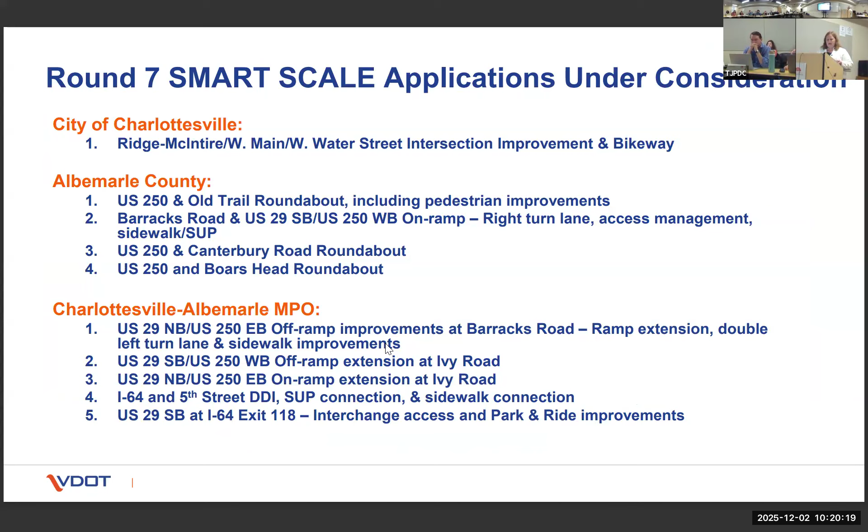This is just a big picture map that shows the location of all the projects. I think Charlottesville's project is a little bit hard to see, but it's right there in Charlottesville.

And so the first project is the bikeway improvement and intersection improvement project at Ridge-McIntire and West Main at the intersection. And Ben, I certainly don't want to steal your thunder. If you would like to talk through it, happy to let you, or I'm happy to take it from here. You go for it. Okay.

Yeah, so this is not the final concept. We're working on updating it. But the main improvements considered as part of this project are that there will be a two-way bikeway along the north side of West Main Street from 4th Street to the Ridge-McIntire intersection. What's different from this concept is that the two-way bikeway is going to continue through this intersection, and it's going to continue along the south side of West Water Street to 2nd Street Southeast.

So southeast, that's next to the parking garage. Water Street is going to become a one-way street going westbound, and it will use South Street as the one-way pair. The final concept is also planning to maintain the contraflow bike lane along South Street. The slip lane at the west intersection at West Main Street is going to be removed.

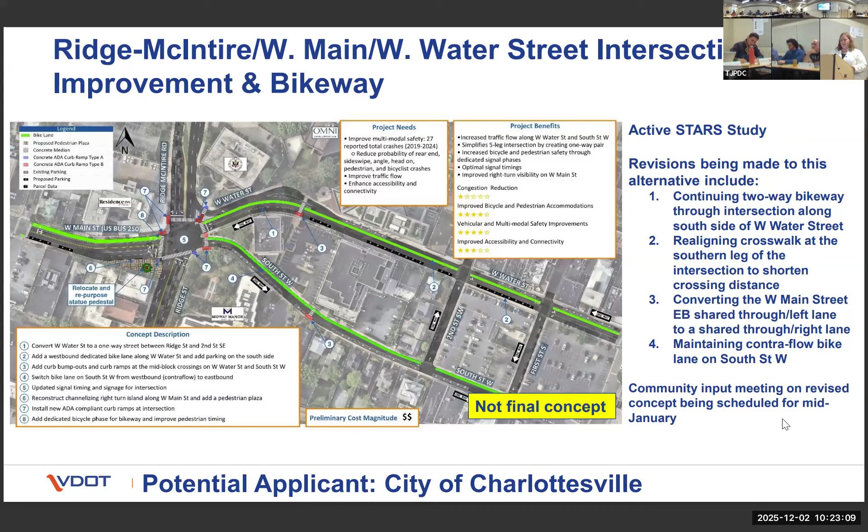Yeah, so that's a good example of how we considered how Smart Scale scores the project when we were considering what the final alternative should be, because Smart Scale would assume to be the funding program that this project would be submitted through. Okay. All right, so moving on to Albemarle County, the first project is a resubmission of the Old Trail and US 250 roundabout.

Do you want to say anything about this, Albert, or do you want me to talk through it? Okay. It includes a hybrid roundabout at Old Trail, which is one of the entrances to Western Albemarle High School, and also includes improving the shared use path that would connect to the shared use path going to the school. So there'd be a shared use path as part of this project.

Where does the shared use path go? It would connect to, I think it's about right there, connecting from the intersection to the existing shared use path that goes into Henley Middle School. Okay, that's Henley. All right.

So I have some questions about this one. Right now, where the traffic circle is proposed, that's where the crossing guards are, right? So you're saying there'll be another crossing that'll be further down than the crosswalk would be. Where would the crossing guards be? I guess that's what I'm saying.

Because there's a lot of kids that walk the trail to school, and I imagine the traffic circle... one of my classmates was actually hit by a car at that intersection, which is why the crosswalk exists now, one of the lights. So I'm just wondering, I know traffic circles in general are safer for pedestrians, but I am very concerned about making sure we don't take a situation we worked really hard to make safe for kids to cross that road and make it less safe.

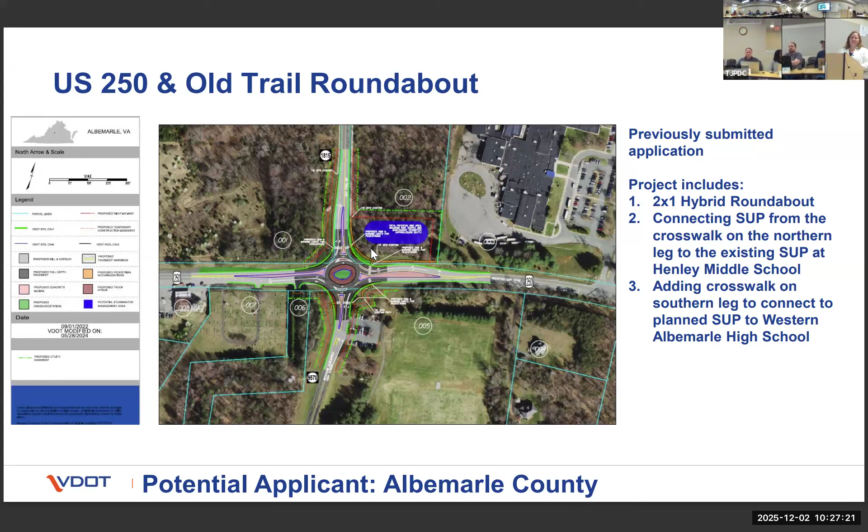Full disclosure, I have a child at Henley Middle School who walks every day from Henley Middle School to Western Albemarle. Yeah, so no, I understand, it's important.

Right, the next set of projects mixes some of the MPO and Albemarle County projects together. We wanted to show all of the projects for Barracks Road and all of the projects for the Ivy Corridor together, so you could see how, if all of the projects move forward, what they would potentially look like cohesively. The red are MPO projects under consideration, and the green are Albemarle County projects under consideration.

Starting with the MPO projects, this is the extension of the eastbound 250, northbound 29 ramp extension coming off at Barracks Road. This would be combined with a double left turn at the intersection with Barracks Road itself. There would be sidewalk improvements from the northern interchange ramp here, connecting down to the existing sidewalk in the city of Charlottesville.

What I did not show, that I realized later, is that we were also planning to do the sidewalk on the other side of Barracks Road, between the interchange ramp. And then for the project the county is considering, there would be a right turn lane from Barracks Road southbound to the on-ramp on US 250 westbound. They would close the median crossover at Ricky Road, and then there would be a sidewalk or shared use path, if we can fit it in within the right of way, between Bennington and the on-ramp.

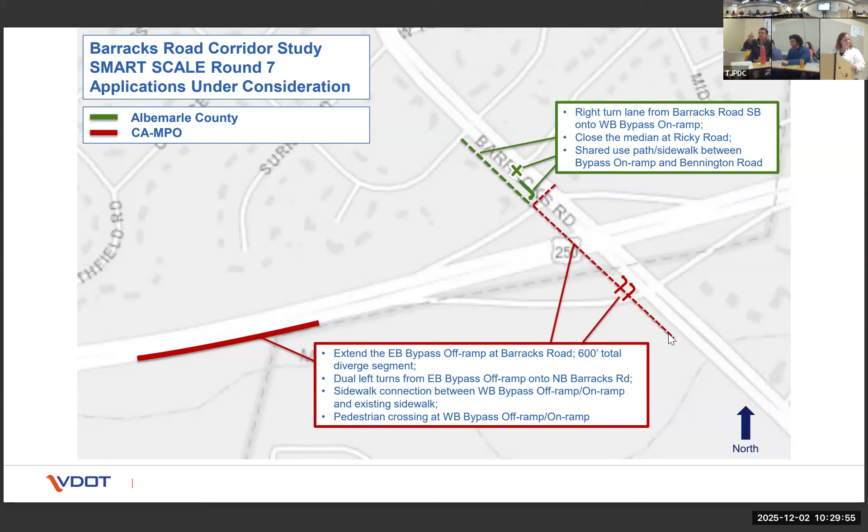You mentioned something that's not shown on the map, but the project would include some sort of sidewalk connection on the northbound side of Barracks Road between the on-ramps. Is that what you're saying? Yeah, right here. So there is a sidewalk there.

Are you talking about just making that compliant? Improve it, yeah. Or make sure that connection goes all the way through. Yeah, I think it does. It's more that it's not compliant, it's like it's at the ramps and such. Well, we would probably have to do that anyway because we're connecting it.

I know we talked about this at length last time, but I did walk out there with the county staff and look at this intersection. There are two things that occurred to us when looking at that. One, is there a way for that sidewalk going underneath the bridge to be multimodal and not just strictly a pedestrian sidewalk? I think the answer is no.

Correct. Okay, so that being the case, has anyone considered maybe instead of having sidewalks on both sides, to actually have something multimodal on one side, and then make sure we have crosswalks on both sides so that people can do this maneuver and go across.

Because while we were sitting there, we saw multiple bicycles going through there just in the few minutes we were there, and scooters and other things. But I think it's the buses, right? Like if you don't have a sidewalk on the other side, how are people going to access those bus stops?

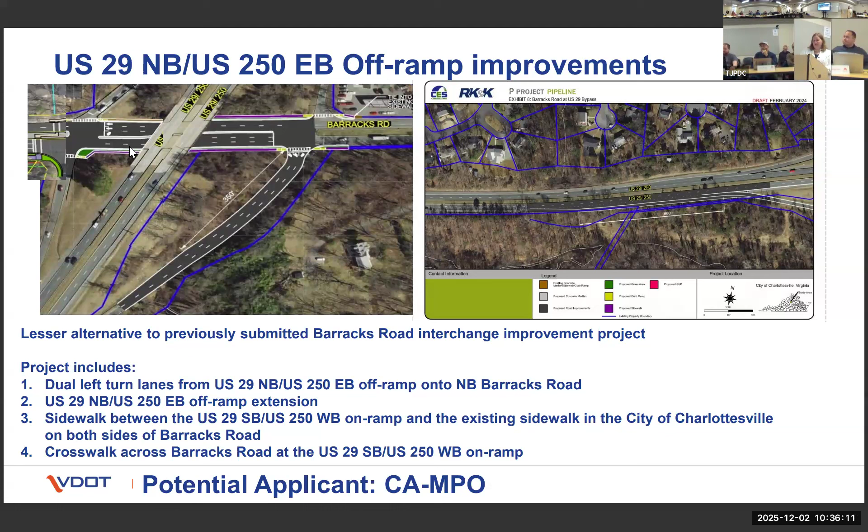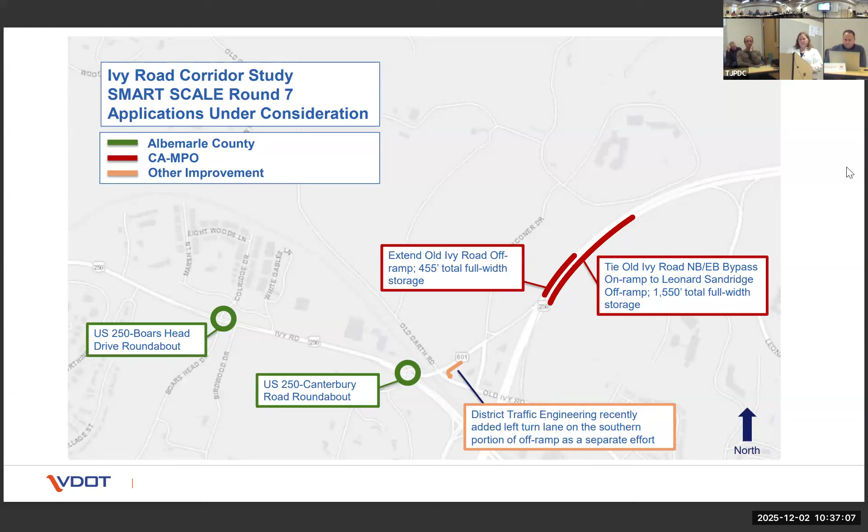All right, so this gets into the Ivy Road improvements. This is the set of projects being considered right now by Albemarle County and the MPO. There's a set of two roundabouts, one at US 250 at Boars Head, one at US 250 at Canterbury Road. I also want to point out that traffic engineering has repainted the pavement at the off ramp from 250, at Old Ivy Road, to add a left turn lane to help move the left turning vehicles away from vehicles trying to go through the intersection. The two ramp improvements the MPO is eligible to submit would be an off-ramp extension at Old Ivy Road, and an on-ramp extension from Old Ivy Road onto the bypass, tying into Leonard Sandridge. We talked about this one at length, but these are planning level concepts, so this is not necessarily the footprint of the roundabout or what it would look like, but it can give an indication of how it might impact the area around it.

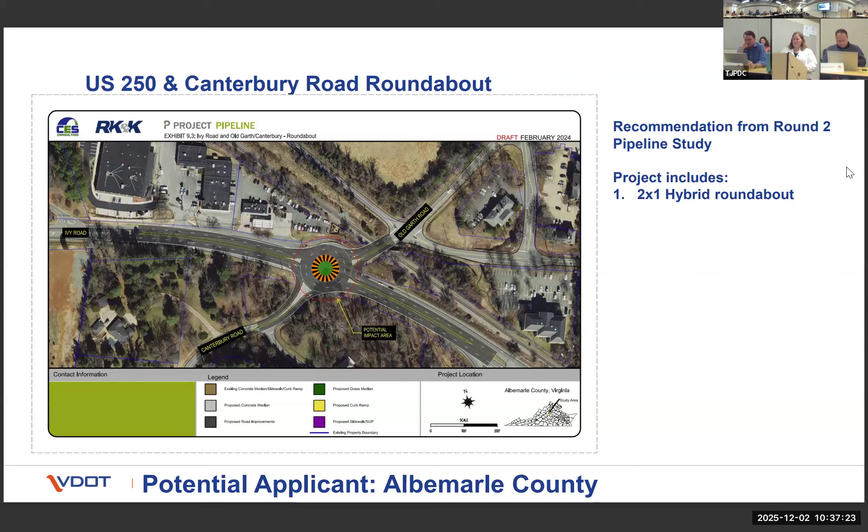That's the one at Canterbury Road. This is the one at Boars Head.

One thing that's always bothered me, and I guess it's really for Albemarle County, but somebody who grew up on Owensville Road, it's amazed me that you've got traffic lights and other things at Boars Head and Farmington, and Owensville Road has a much higher volume of traffic coming out onto 250, yet doesn't even have so much as a stoplight. It always felt to me like a wealth thing, like because people in Farmington and Boars Head had more money, they got a traffic circle and roundabouts, but Owensville never did. But let's just leave it there.

I think Chuck would certainly know this off the top of his head. I think there was a corridor study that might have addressed that from maybe 8 years ago or so. I'll go back and see if I can find recommendations from that. Yeah, I'd love to know what the plan is for Owensville, because that's a disaster right there.

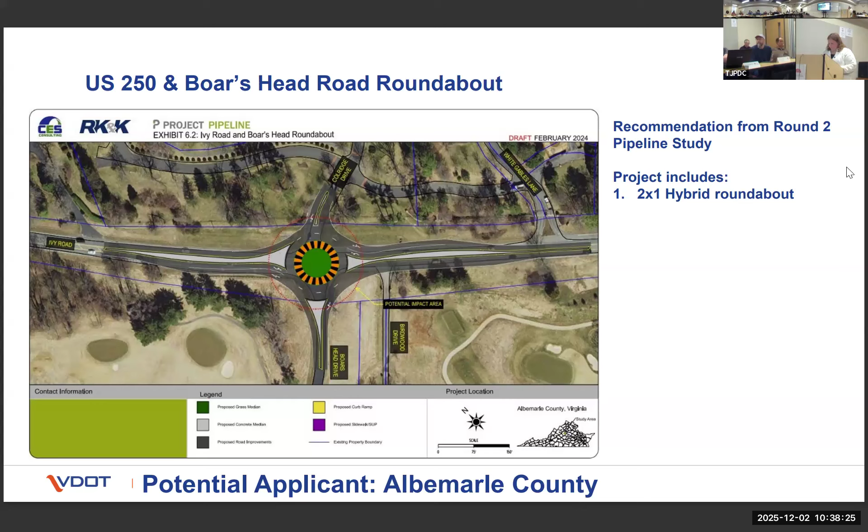And those are the ramps. Okay, so we talked about 250 a little bit, and we talked about the Fifth Street DDI a little bit, and I want to spend just a minute going through this because I think there's a lot of desire to do a full multimodal connection across this street, and we certainly would like to do that as well. We're left in a situation where we have a lot of constraints on this project, so figuring out how to move forward is challenging on this one.

Most of you were here for round 6, but we submitted the DDI previously as part of the round 6 slate of applications, and it included the full shared use path down the median on Fifth Street. What happened is our bridge section determined the bridge could not accommodate the shared use path without the bridge being reconstructed. So the cost of reconstructing the bridge ended up being accounted for as part of the cost estimate for that smart scale application. The cost of that project was about $79 million.

So when we looked at the benefit score, which was 16.9, and looked at the lowest scoring high priority project from round 6, we found that in order for the benefit cost ratio to have been high enough to have been funded in round 6, the bridge could have cost no more than $42.7 million.

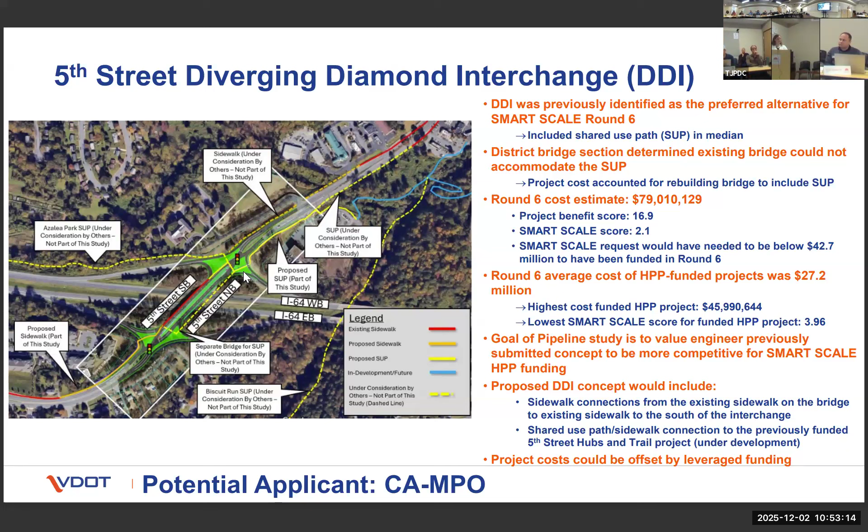All right, I want to spend a second going through the history of 118 because there are folks in this room who probably haven't been here since 2011 when discussions on this whole area started. There were some studies done starting in 2011 and 2013 looking at the 118 interchange and traffic on Fontaine. At that point, the concerns identified were traffic backing up on westbound Fontaine going to the 29 bypass interchange, weaving on 29 northbound between the 64 westbound off ramp and the Fontaine off ramp, weaving on I-64 eastbound between the two loop ramps, and weaving on 29 southbound between the two loop ramps, plus safety concerns about the 29 northbound left turning traffic.

I say all this because when we put the survey out—and we haven't finished vetting it, so I'm not prepared to share results from the survey today—there were a lot of questions about why can't we go back and rebuild the interchange, and this gives us a bit of history of how we got to where we are today.

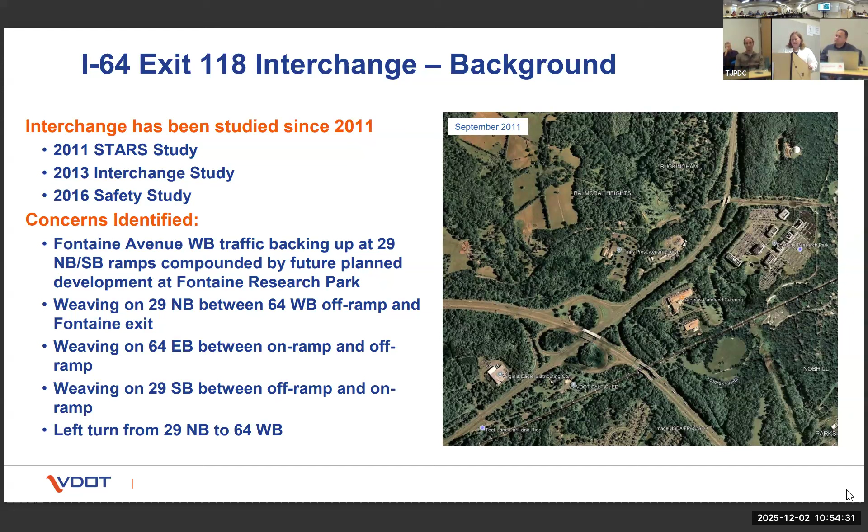So these were the concerns originally identified in the 2011 and 2013 studies. When the study was done and recommendations developed, the recommended improvement was this braided diverging diamond interchange. This included grade separations, so the diverging segments wouldn't be controlled by lights, but would be grade separated so they could have free movements.

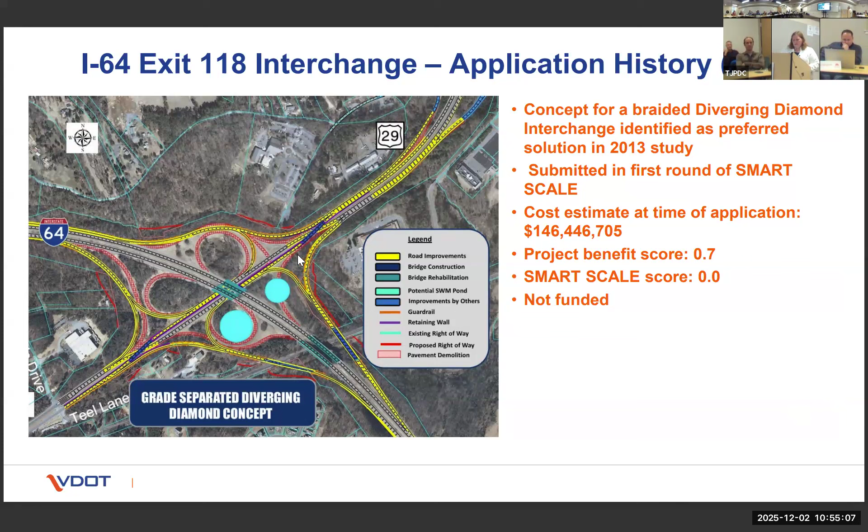It was submitted in the first round of Smart Scale with an estimated cost of $146 million, and it basically got a Smart Scale score of zero, so it was not funded. What happened is that folks at VDOT started pulling apart the different issues individually to see what we could do to address these concerns one at a time.

One way to eliminate both the weaving concerns on 64 eastbound and on 29 southbound is to eliminate this loop ramp right here. So the concept was developed to have the 29 southbound traffic stop at a traffic light, turn left to get onto 64 eastbound, and then put in double left turn lanes.

This was submitted in Smart Scale Round 2. The funding amount requested was just under $6.8 million. It was not funded. During that same year, however, there was a scaled-back concept submitted through the Highway Safety Improvement Program, submitted later that same year.

It involved a single left turn lane, but similarly removing the loop ramp and having that traffic from 29 southbound to 64 eastbound turn left at the light. This project was funded at a cost of $1.3 million. We were able to address the weaving issues on 64 eastbound and 29 southbound.

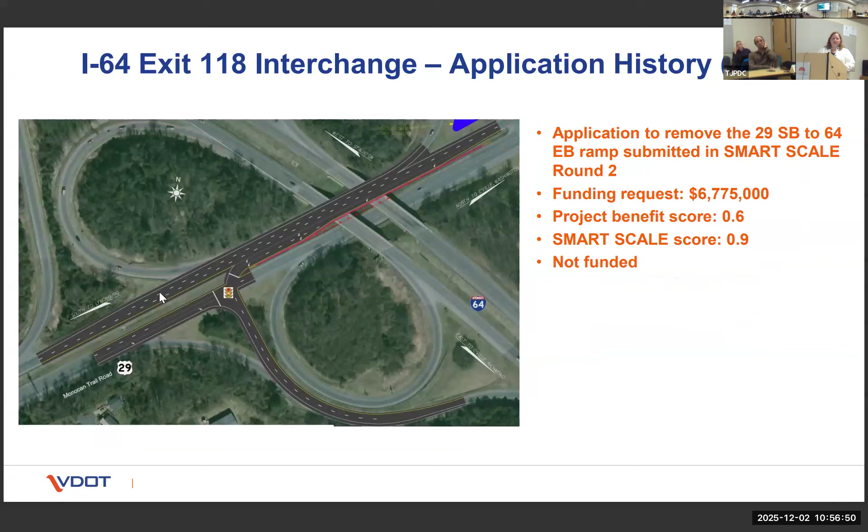At that point, though, it was identified that this left turn at the intersection was going to be a shorter-term alternative. It worked in the current scenario, but at some point before the future year scenario it would break down. I do want to mention that while this was the concept submitted and funded, the concept actually constructed had double left turn lanes. So it does have double lefts, yeah.

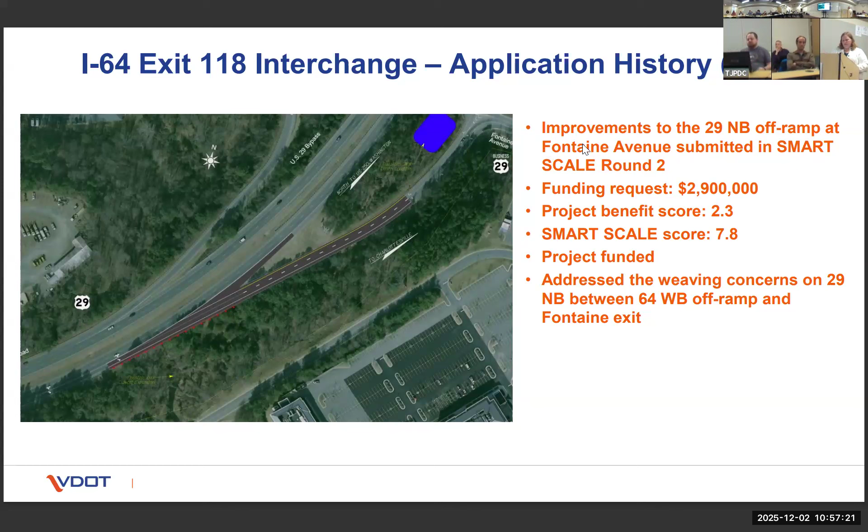All right, so that addressed the weaving on 29 southbound and addressed the weaving on 64 eastbound. To address the weaving between the 64 off-ramp and the exit onto Fontaine, there was this ramp improvement project submitted in Smart Scale Round 2, with a cost of $2.9 million, and it was funded. So they were able to address that weaving with a $2.9 million project.

We still haven't addressed the lefts from 29 northbound onto 64 westbound, or the backups occurring on Fontaine, especially with some of the additional development planned at Fontaine Research Park. So in Smart Scale Round 3, the diverging diamond at Fontaine was developed. The total funding request was $21.9 million. It got a pretty good benefit score, but it wasn't funded.

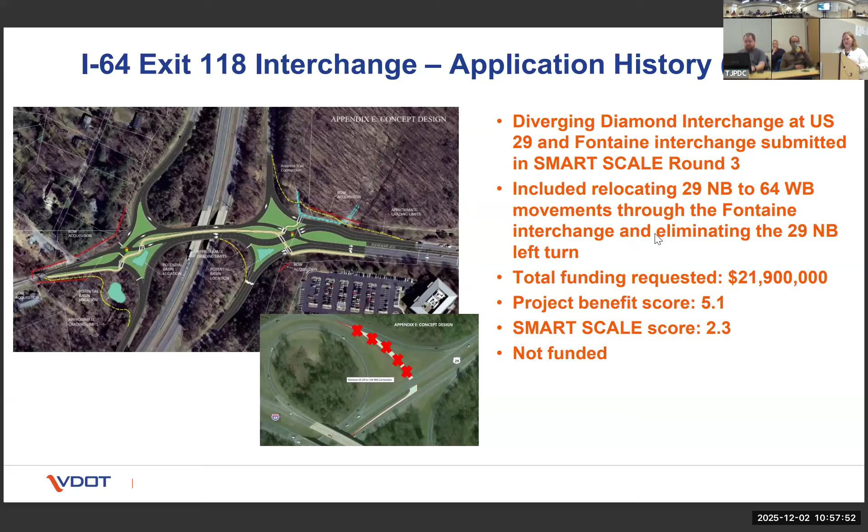Then in Smart Scale Round 4, we had a revised concept submitted for this displaced left turn. That was $12.4 million, and this was funded. A lot of you are aware there was some discussion after this project was funded to revise the concept. What I want to point out is that the project ultimately funded was $12.4 million, and it addressed the safety and operational concerns for the 29 northbound to 64 westbound movement and the operational concerns at Fontaine Avenue.

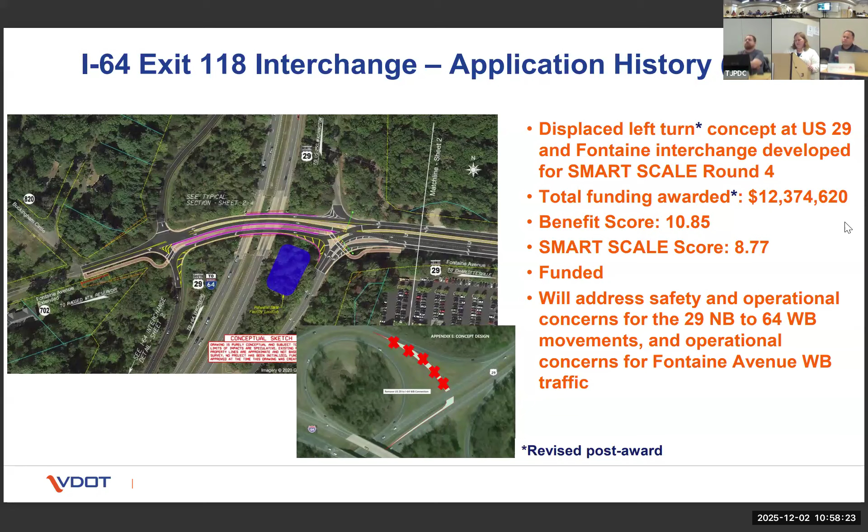So what happened is that through this series of smaller projects, this is what we were able to get funded at a level of $16.6 million, not accounting for post-award cost adjustments, compared to the original concept, which was $144 million. But we still have this outstanding concern to address those 29 southbound to 64 eastbound movements, which was introduced in an effort to resolve the other original concepts that were funded.

So what we see here is some alternatives identified that could help eliminate some of the problems we're seeing at that 29 southbound movement to get onto 64 eastbound. This is a median U-turn, where the traffic goes further south past the ramp to get onto I-64 eastbound, and there would be a median U-turn to allow those vehicles to make a U-turn at a light further down 29 south, then come back up to access the ramp.

There's this improvement which would just moderately move the intersection south a little bit to increase the storage capacity of the existing left turn lanes. And then there was this concept down here that would basically reverse the ramps where there was a stop control.

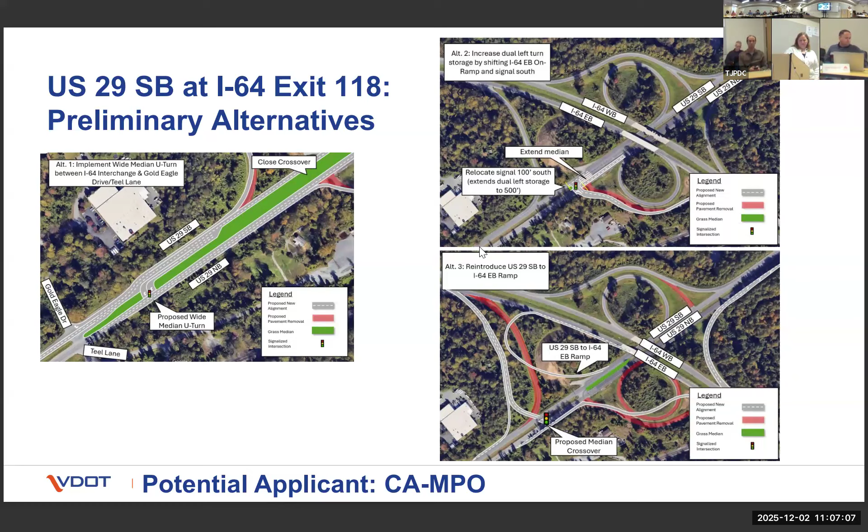Other questions? Do you want me to turn it over to you all? Sure, thanks Sandy. So what was included in the packet was a staff memo that recapped the projects currently under consideration.

The only note we have is that the MPO has 4 application slots we can submit for final applications. At the point of pre-application in March, however, we can submit up to 5, just in case one of those 4 were to screen out for eligibility or readiness issues at that point.

So staff would recommend that we submit all 5 projects under consideration, but we'll be asked to prioritize, so that if all 4 end up going in, we know what's the 5th one we'd want to pull out for evaluation. We proposed in the staff memo that the US 29 northbound and 250 eastbound on-ramp would be submitted as that 5th application slot, the lowest priority.

But since we sent out the packet, staff have learned more about the significant operational issues actually present at the 29 southbound and 250 westbound off-ramp extension, even though that has a lower V-Trans need. So we'd recommend swapping those two from what's in the staff memo and submitting up to our application limits in that order.

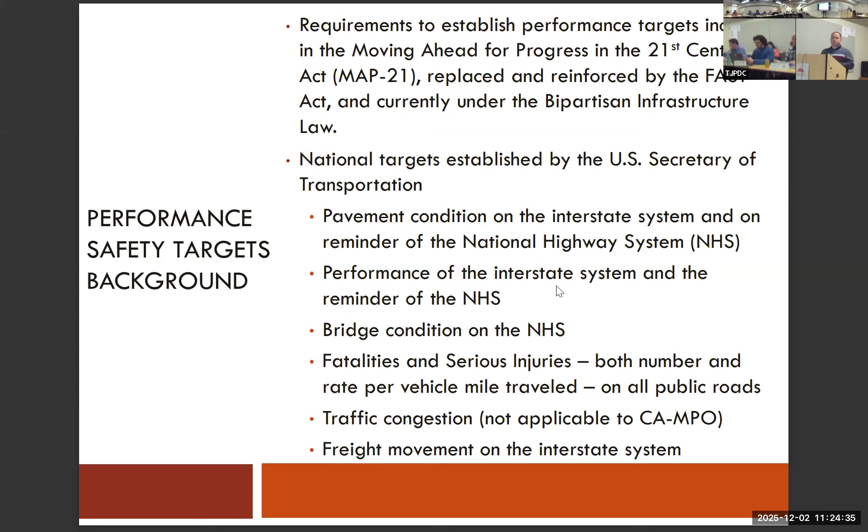One of the key reasons we adopt performance safety targets is to be in compliance with federal funding requirements. MPOs are not held accountable for meeting those targets; that responsibility lies with the state. However, MPOs have to support the states in achieving its safety goals. Historically, this MPO has adopted alternative targets until 2023, where they adopted state targets, and then in 2024 and 2025 adopted aspirational targets, which are in line with the Comprehensive Safety Action Plan, Move Safely Blue Ridge.

So the state, which is VDOT, provides us with valuable data to inform our strategies, where they include a recent trend line and a long-term trend line. When we adopt performance safety targets, we focus on 5 key metrics: the numbers of fatalities, serious injuries, their rates, and also the number of fatalities and serious injuries for the non-motorized transportation modes.

One thing I want to note is that sometimes the long-term trend line and the recent trend line will show increases in the number of fatalities and serious injuries. While this may seem counterintuitive, it's just to show how we're using the data to inform our strategies when we adopt the safety targets. The final table represents what the MPO goal percent change would be for the safety targets that they choose to adopt. Responsibility for the adoption is going to be with the MPO Policy Board, but we're asking the MPO Technical Committee today to make a recommendation on which targets we're looking to adopt.